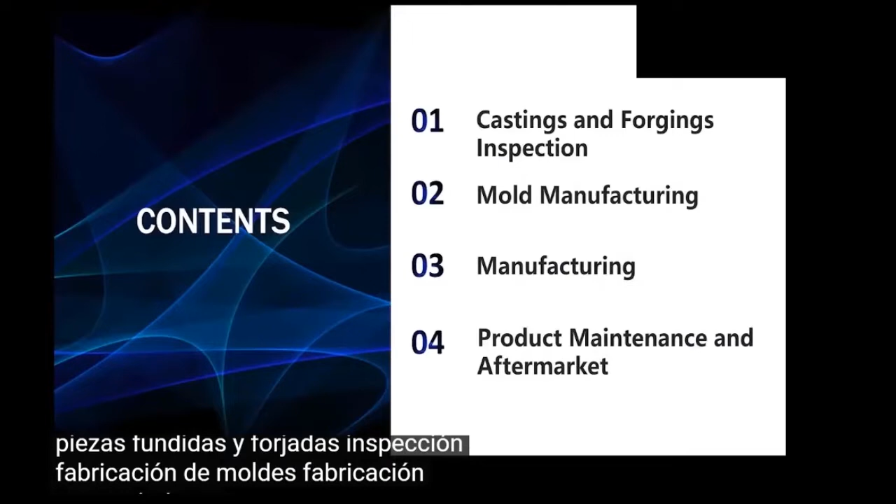Today, the topic is 3D laser scanning technology empowers high-end equipment manufacturing. The presentation consists of 4 parts: castings and forgings inspection, mold manufacturing, product maintenance and aftermarket. These are also the main phases of industrial manufacturing.

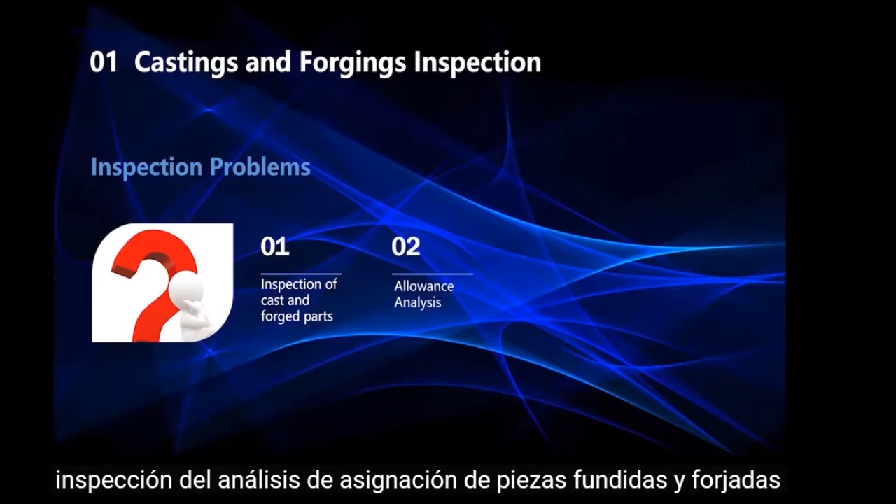First, let's talk about how 3D scanners are applied in casting and forging. There is a long history of casting and forging, which can date back to thousands of years ago. Here, I will discuss 4 aspects of the inspection. Inspection of the cast and forged parts. Allowance analysis. Delivering the inspection results to the manufacturing equipment. The last is the optimization of the design of casting mold and forged die.

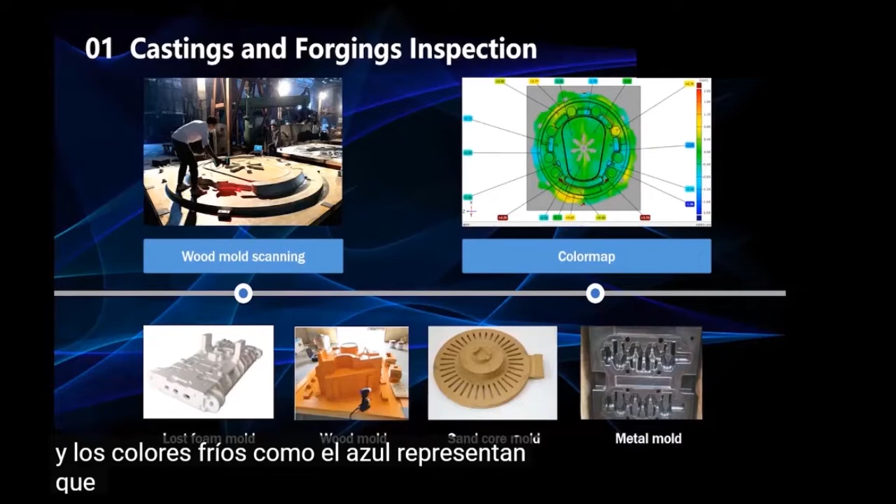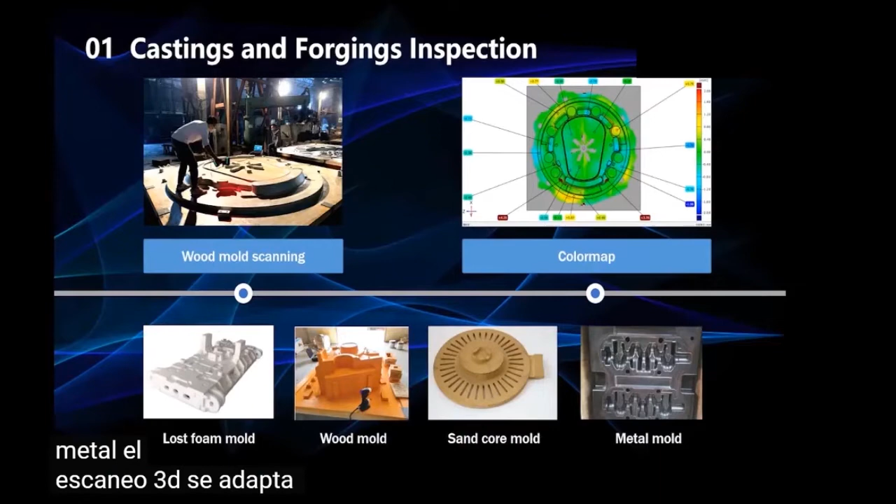The warm colors such as yellow and red and cool colors such as blue represent that deviations are outside the desired range. It is very convenient to identify these deviations to correct these molds. The molds come in different types: lost foam mold, wood mold, sand core mold and metal mold. 3D scanning suits well for these molds. Now, I'll show you some examples of how 3D scanning is used in mold inspection.

Allowance analysis is the basis of the measurement of the cast and forged parts. When a forged part is manufactured, we should identify if there are sufficient or insufficient allowances on the pre-machined surfaces. Then, we need to check whether there is a uniform allowance distribution on non-machined surfaces.

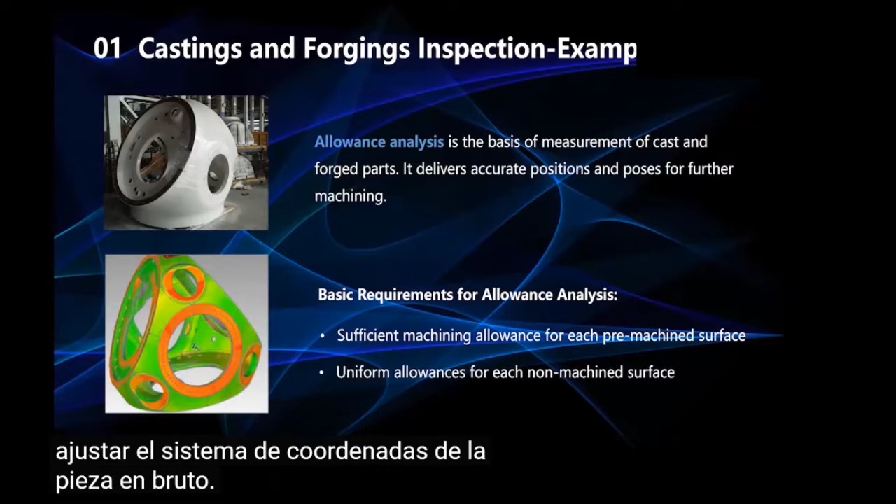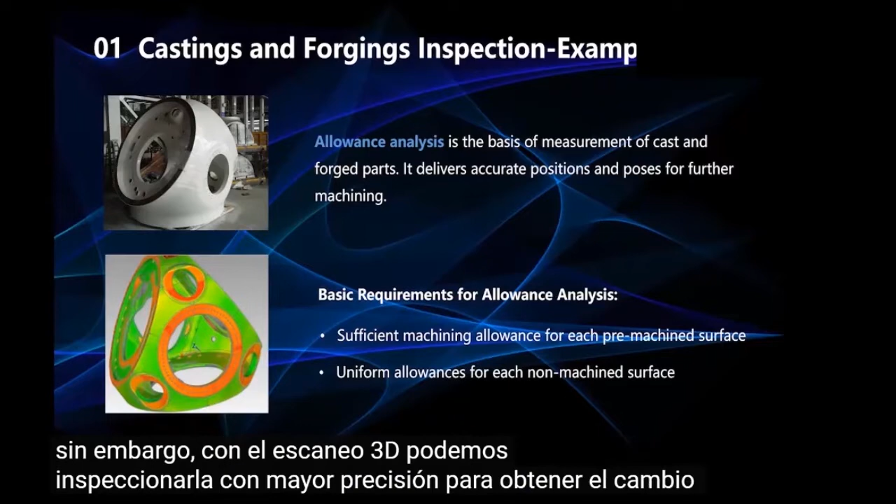The key to precision machining is to adjust the coordinate system of the blank. In some cases, the blank can't be precisely machined with traditional ways. However, with 3D scanning, we can inspect it more accurately to get the chance to adjust its coordinate system and machine it. How to machine the blank? We need to obtain the datum for the tool setting. I've listed a few of them here.

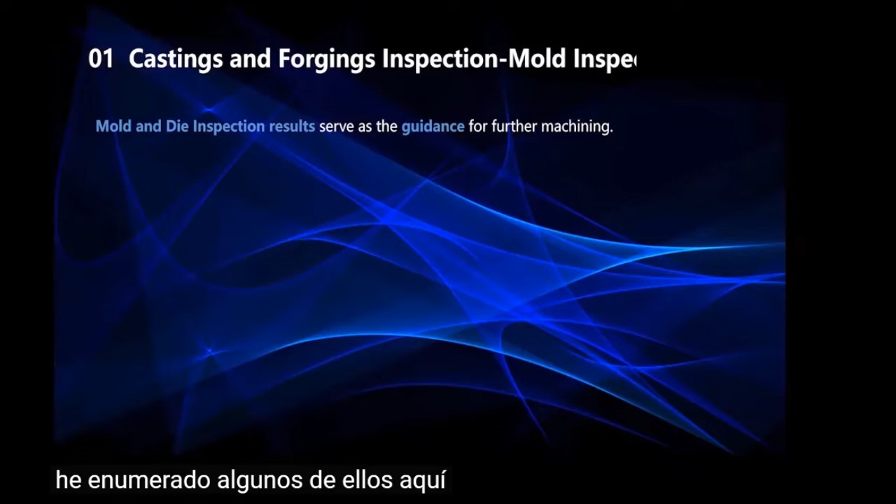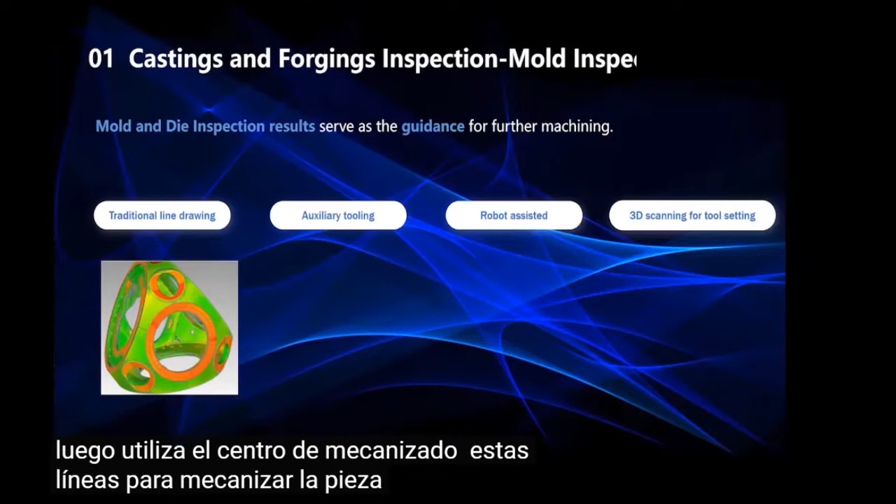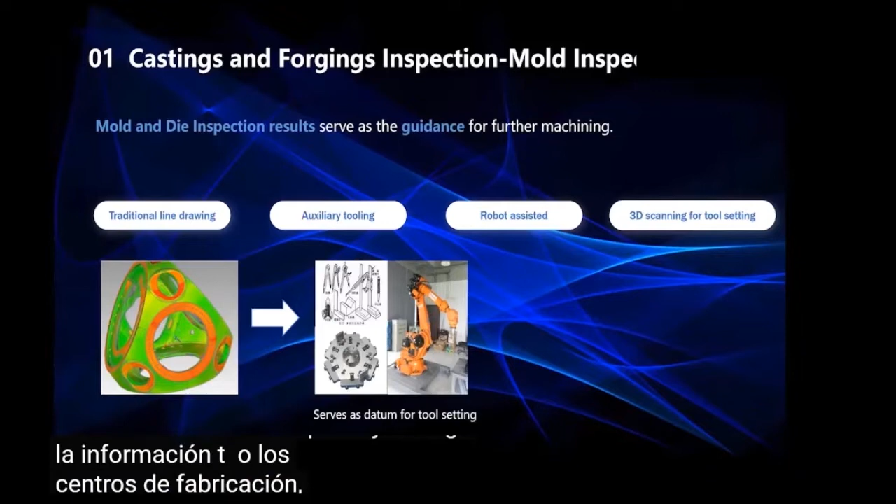Traditional line drawing. Technicians draw lines on the cast part, and the lines serve as a datum. The machining center then uses these lines to machine the part. Second, auxiliary tooling. Then, the robot-assisted method. The robot marks the part and delivers the information to the manufacturing centers. Another way is to align the scanned data with the equipment of machining centers. Adjust them to the same coordinate system so that the blank can be applied to the center directly.

Delivering the inspection results to a center for machining is one of the hot topics in the industry. A large number of companies have devoted themselves to researching it. We have done a lot of research on this and completed a lot of projects.

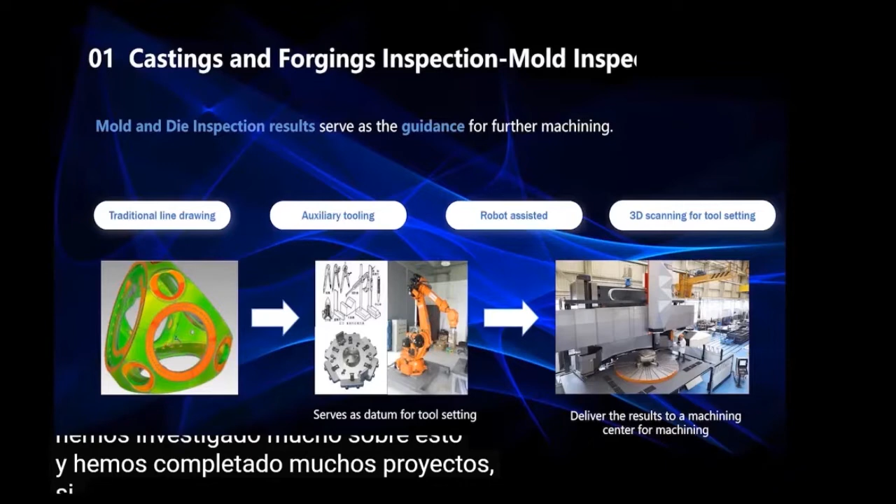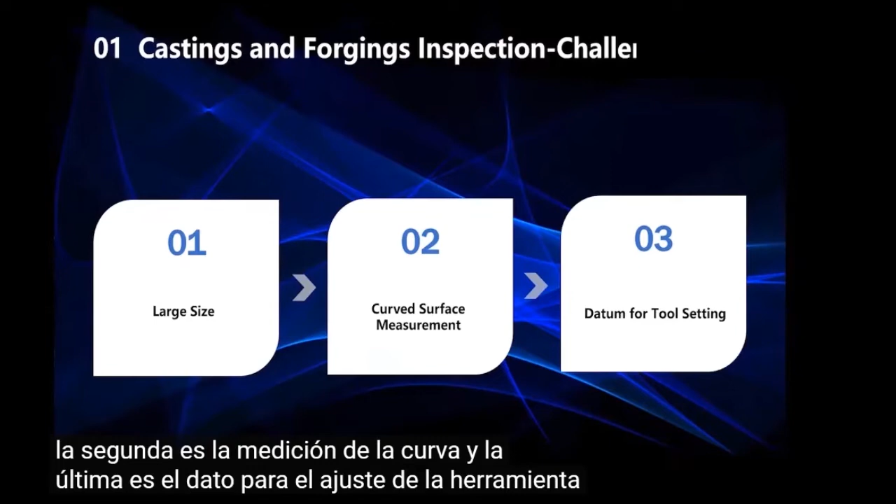Now, let's take a closer look at the casting and forging measurement characteristics. The first feature is large size. The second is curved surface measurement, and the last is datum for tool setting. So let's look at 2 cases. The first is the inspection of a large-scale wind power hub with curved surfaces.

The ordinary 3D scanner aligns scans with markers. When it comes to 3D scanning this huge part, alignment by the marker is insufficient to obtain precise results. Its alignment errors accumulate over the distance of measurement. There is a particular technique called photogrammetry, which suits well for wide-range measuring. It can take pictures from different angles with coded markers to obtain 3D coordinates.

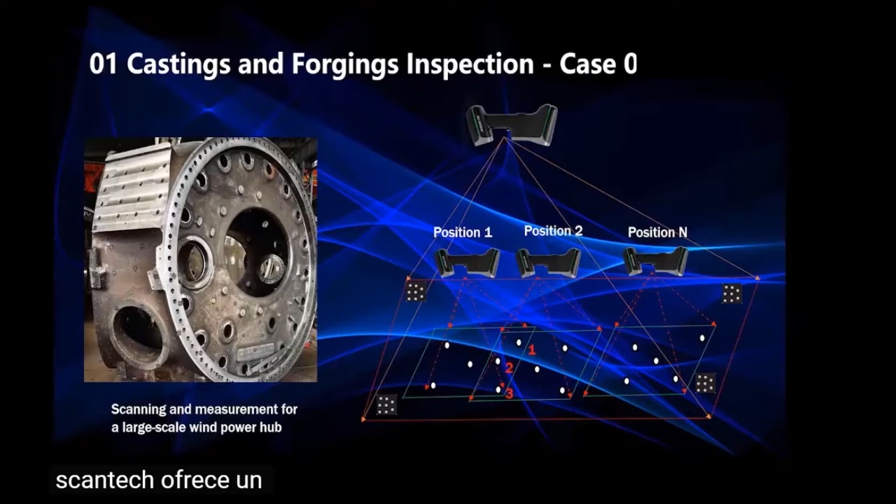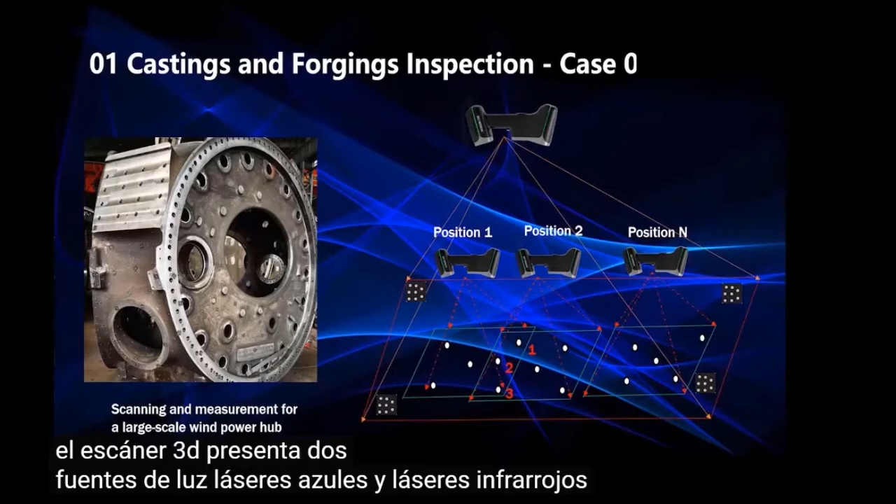The second case is a mold that features deep grooves. 3D scanners project lasers onto the surface of a part, and its two cameras are used to capture the reflected lasers. These two cameras have to see lasers at the same time. The camera distance of ordinary 3D scanners is relatively long and it is hard for them to capture details in grooves.

We have a compact 3D scanner SimScan that is specially designed for it. The distance between its two cameras is much shorter, and the angle between the two cameras is relatively small, making it convenient for scanning deep grooves.

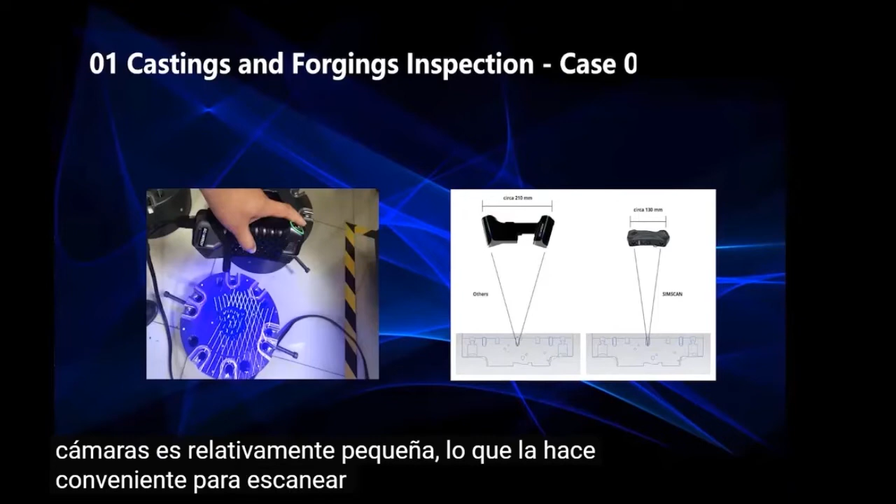Now, let's move to the second part, mold manufacturing. Mold is known as the mother of industry. It is a piece of important equipment in product manufacturing. A part that is newly cast will be sent to the machining center. The first task is the inspection of the rough part. We need to check its allowance.

Its allowance may be sufficient for machining, but it may be non-uniform over the surface. There may be 20 mm allowances on one area and 2 mm allowances on another area. If we refer to a CAD model to set the machining program, we may face the challenge that the machine fails to eliminate the metal layers thinner than preset parameters. Therefore, we waste time processing. 3D scanners can obtain the accurate data on the blank and adjust the machining equipment by setting the program precisely.

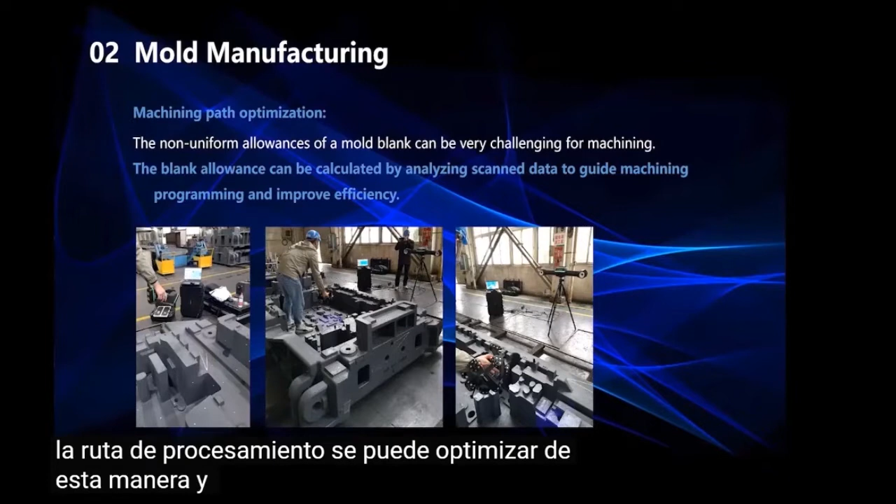The processing path can be optimized in this way and increase machining efficiency. What else can we do? We can scan the mold machined and compare it to the CAD model to generate a report. The color map report can tell deviations intuitively. Green means qualification and red means disqualification. We can even get the specific values of deviations.

Here is another example, which is assembling analysis. When the mold is manufactured, we must check whether the punch matches the die by assembling them. Check the interference or gap. Our 3D scanner can scan the die and punch fully and virtually assemble them on the computer to analyze it quickly. It's also a meaningful way to improve efficiency.

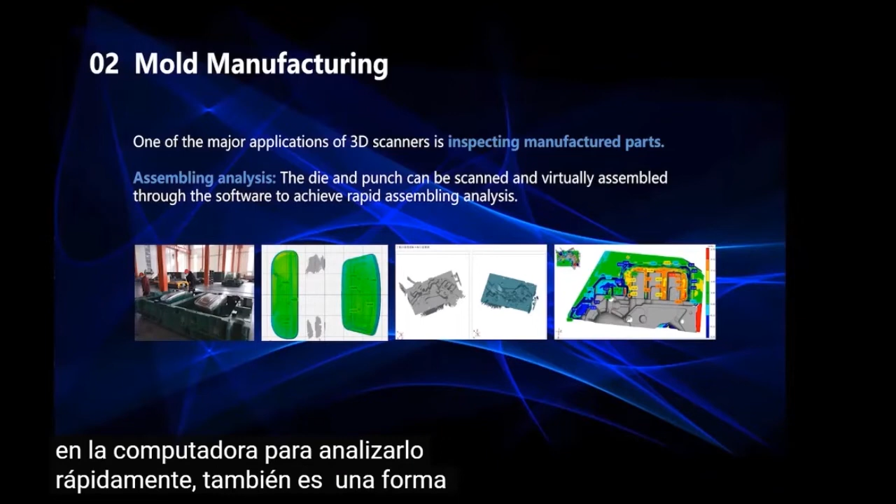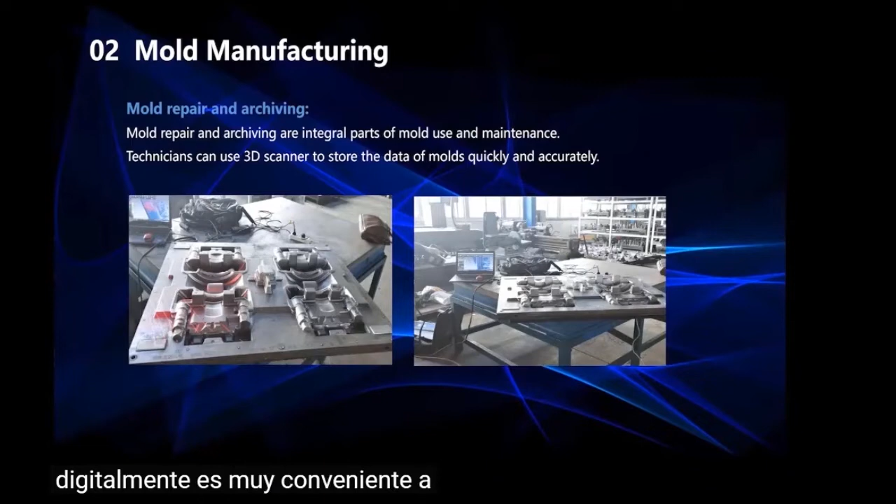The in-service molds are subject to wear and tear. So, we need to repair them. Our 3D scanners can scan the mold and compare it to the original model to identify areas to be repaired precisely. During the repair, there are many versions of changes. We can record these changes digitally by scanning parts and storing them digitally. It is very convenient.

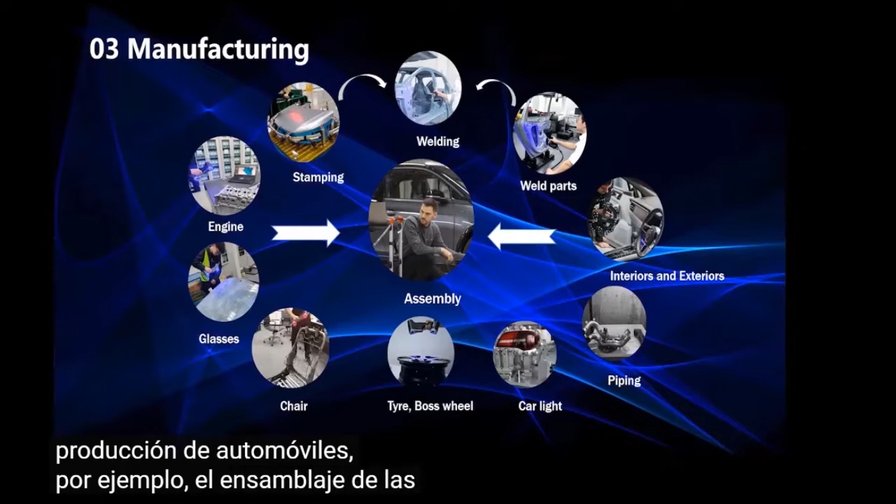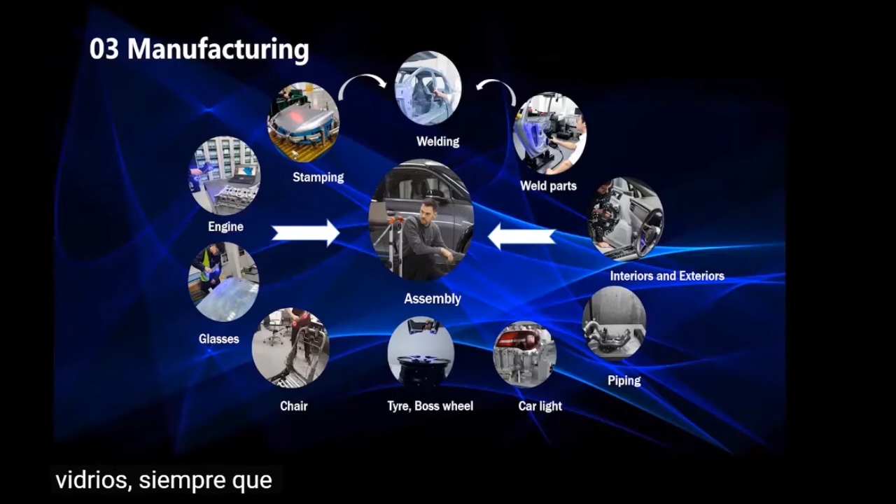Next, we'll talk about manufacturing. 3D scanners are widely used in this industry. Let's take the automobile industry as an example and look at the process of producing automobiles. For example, the assembly of the engine, stamping parts and the subassembly. There are interior and exterior piping, lights, tires, wheel hubs, seats, and glasses. As long as the dimension is involved, a 3D scanner is needed. We can use 3D scanners to analyze the dimensions.

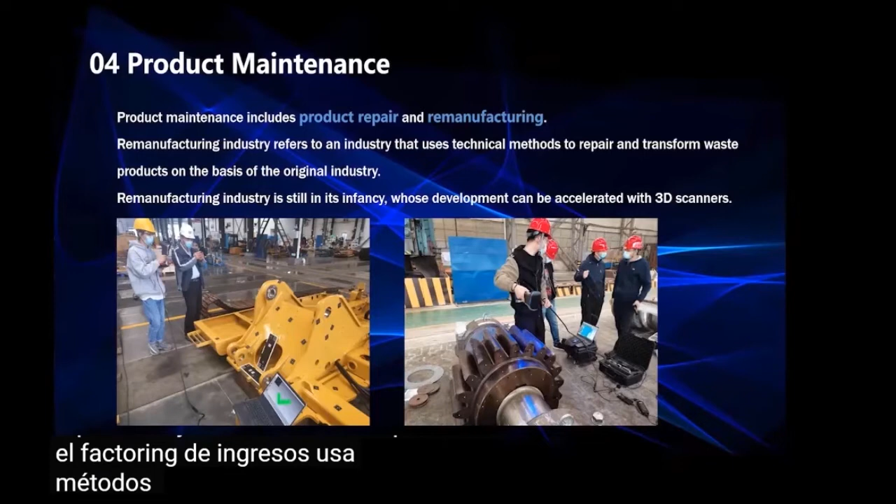Besides the manufacturing, another application is product maintenance and aftermarket. The maintenance part of the product is a process of remanufacturing. It is an emerging industry. Product maintenance includes product repair and remanufacturing. The remanufacturing uses technical methods to repair and transform waste products based on the original sector.

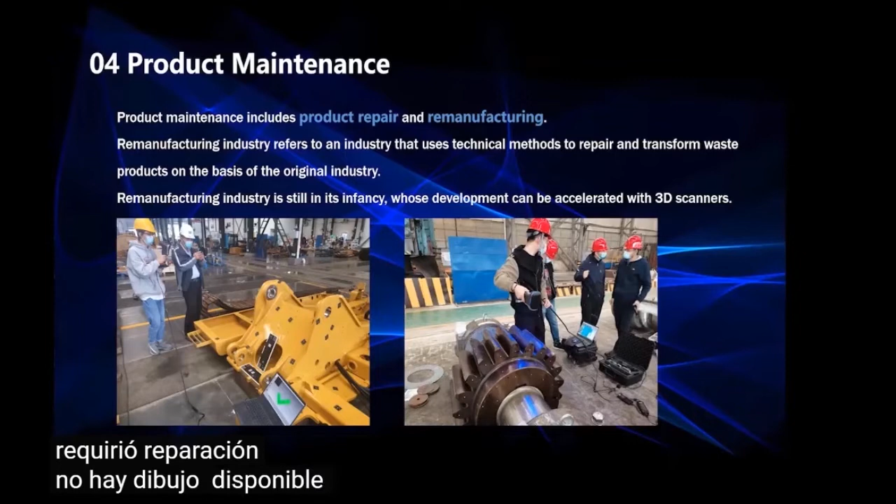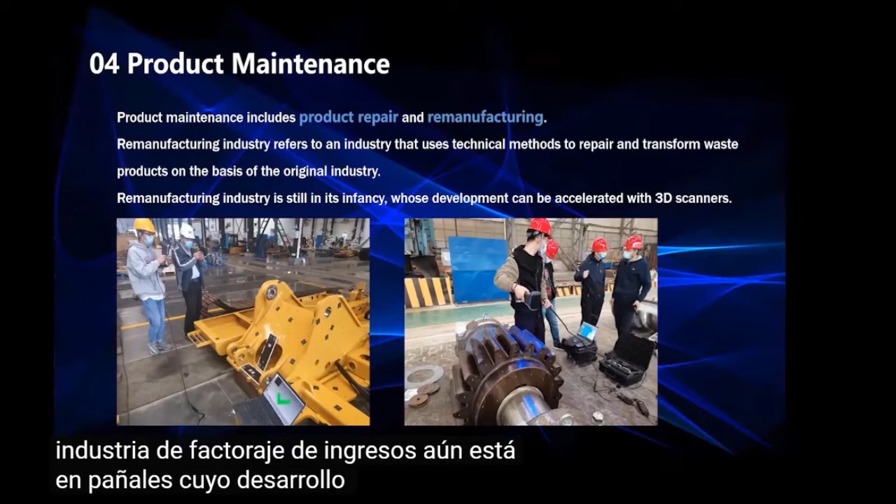The picture on the left is of a broken-down engineering machine, and some of its shafts were broken. Or we can say the shaft was deformed and required repair. There is no drawing available, so we need to scan it first. After analysis, we can provide guidance for the remanufacturing. The picture on the right is the scanning and analysis of a part for repair. Remanufacturing industry is still in its infancy, whose development can be accelerated with 3D scanners.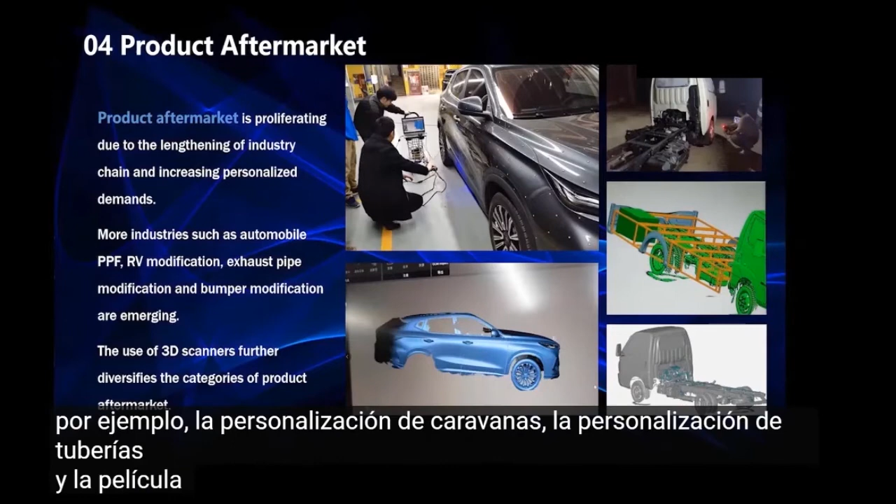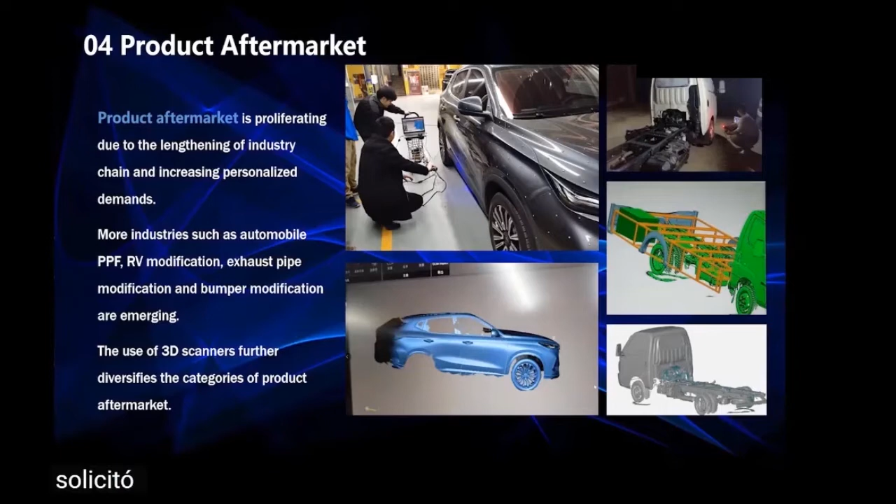Another application of the product aftermarket is customization. Customization is proliferating as the living standard improves. For example, caravan customization, pipe customization, and paint protection film. Our 3D scanners can obtain the dimensions of parts and conduct various tasks. Therefore, we can be confident in saying that 3D scanners can be widely applied for customization.

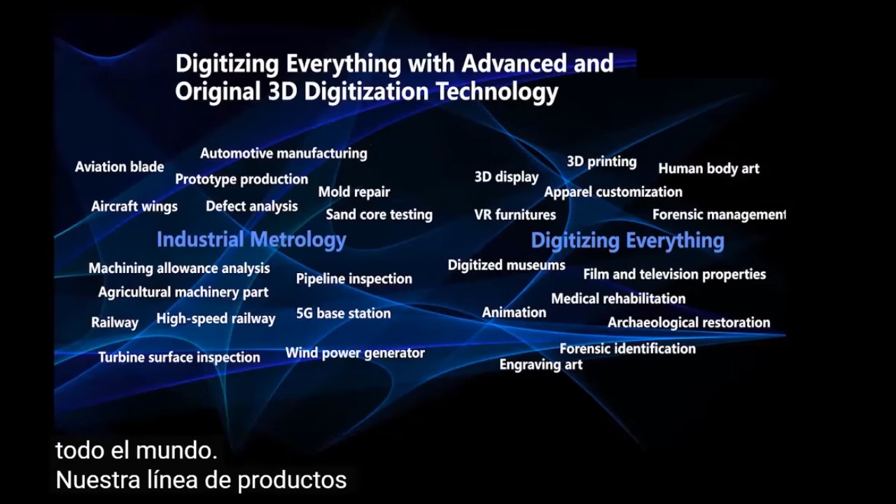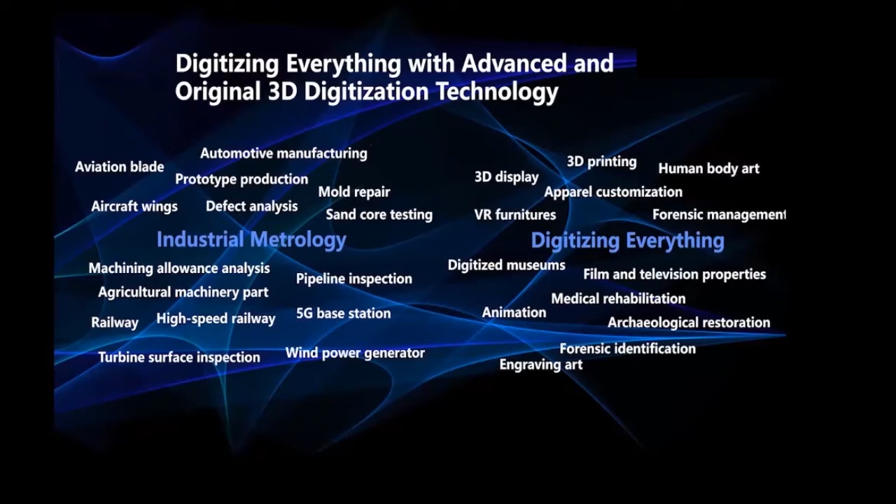Today, my topic is how to utilize 3D digitization technology to empower 3D printing. Scantech is one of the earliest high-tech companies starting to research and develop handheld 3D visual measurement devices worldwide. Our product line ranges from metrology-grade online and offline equipment to consumer-grade color 3D scanners. Scantech's 3D scanners are widely used for metrology in industries such as aerospace, automotive/rail transportation, machinery manufacturing, and so on. Besides that, we are working hard to improve our in-house 3D digitization technology. Combining 3D scanning and 3D printing is one of our core research areas.

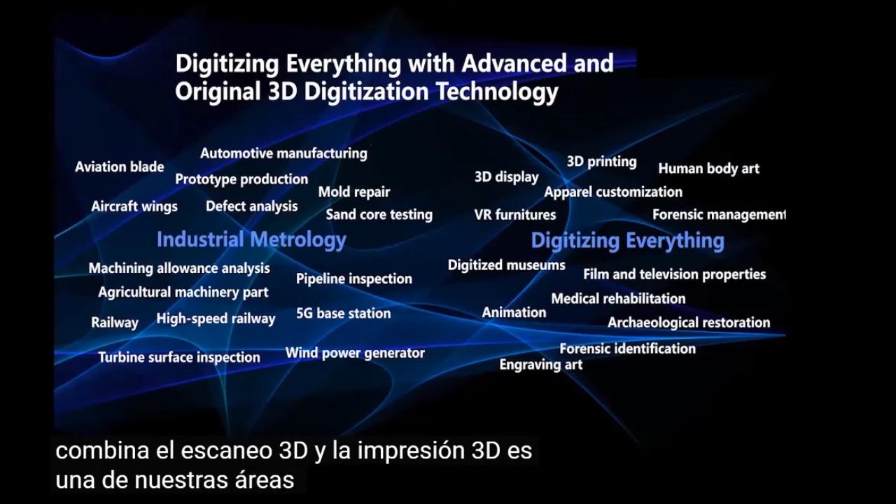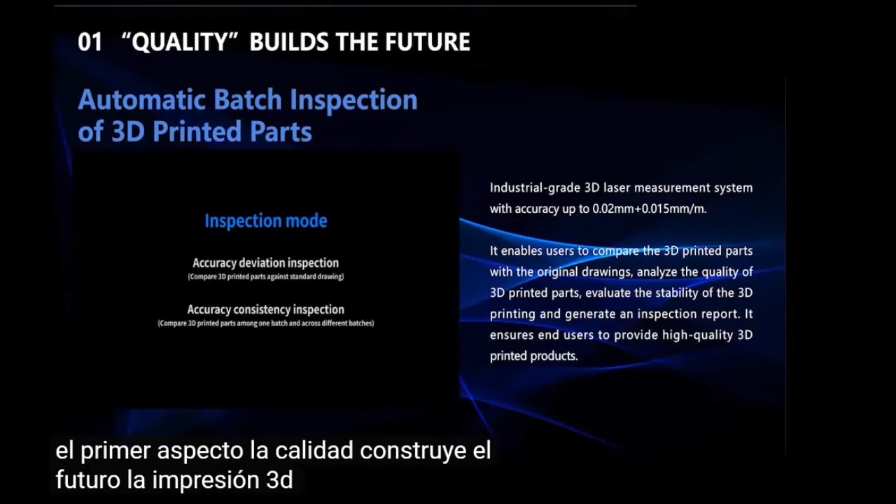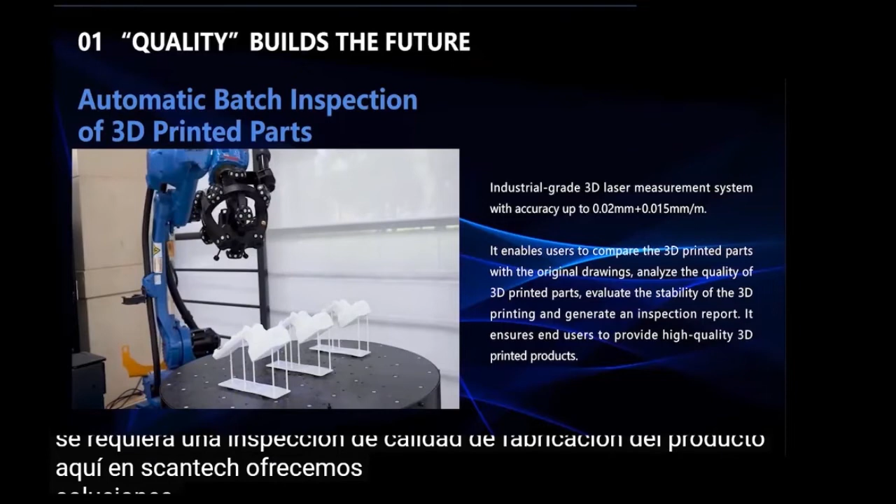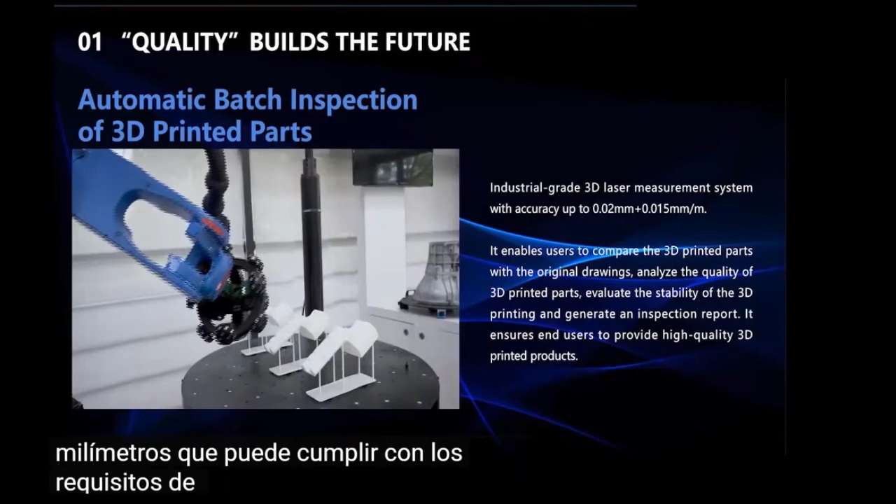Then, I'll introduce you to 9 aspects of 3D digitization technology, how we utilize 3D digitization technology to empower the 3D printing industry. The first aspect, quality builds the future. 3D printing requires high-end tech and strict quality control. As long as there's product manufacturing, quality inspection is required. Here, at Scantech, we offer mature solutions for automated batch inspections. The industrial-grade laser 3D scanner we use has a maximum accuracy of 0.02 mm, which can meet the inspection requirements for most 3D printed parts.

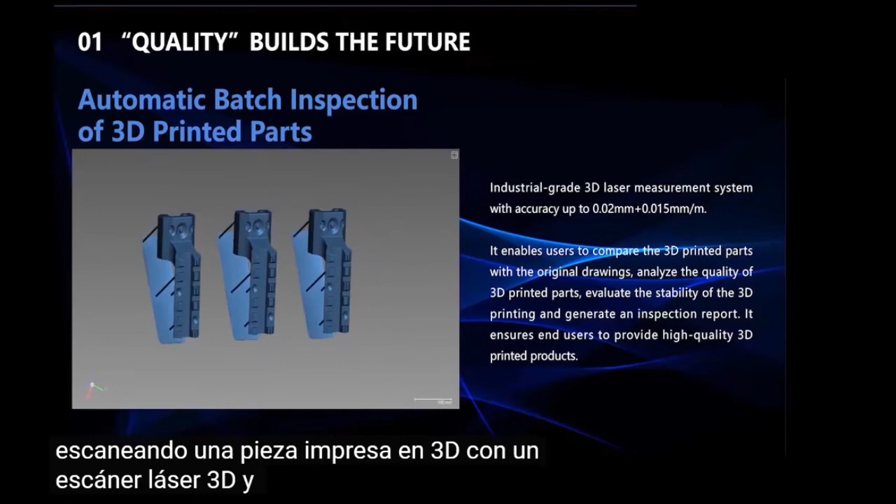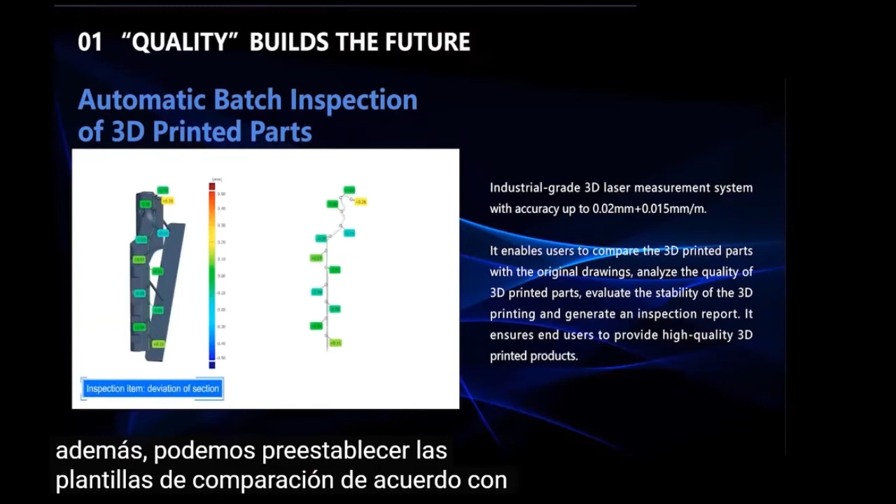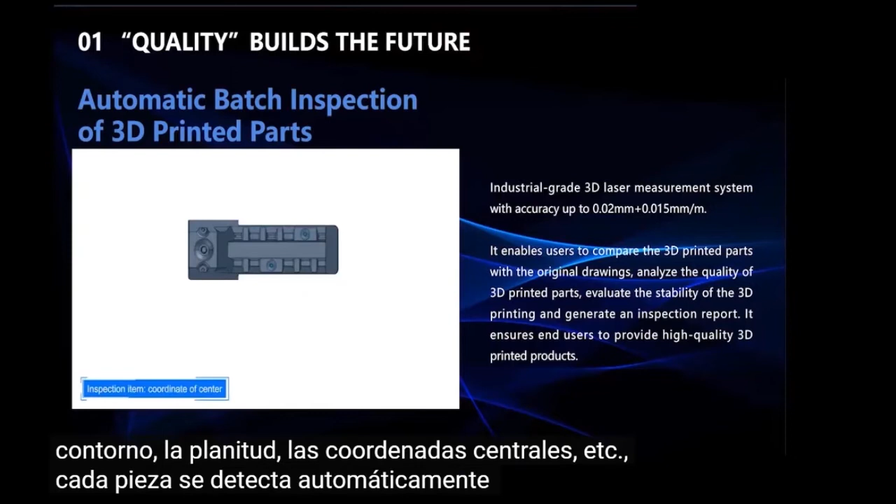As we can see in the video, we can automatically generate a color map by scanning a 3D printed part with a 3D laser scanner and compare it with the original CAD model. In this way, we can tell if it is qualified or not at a glance. Besides, we can preset the comparison templates according to the inspection requirements to inspect items such as section deviation, center distance, contour, flatness, center coordinates, etc. Each part is automatically detected one by one according to the templates with an automatically generated inspection report.

This fast and comprehensive inspection method can be used in 2 aspects. One is to scan the finished 3D printed parts, compare them with the standard drawings, analyze the quality of 3D printed parts, evaluate the stability of the 3D printing and generate an inspection report. It ensures end users are provided high-quality 3D printed products. The other one is to use it to detect and compare different parts in the same batch or different batches, analyze the stability of 3D printers, and assist in the research and development of 3D printers with more stable production performance.

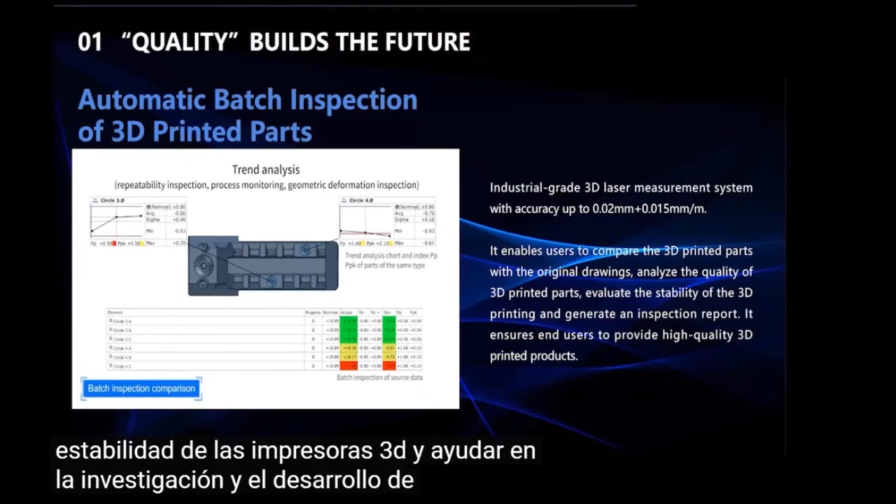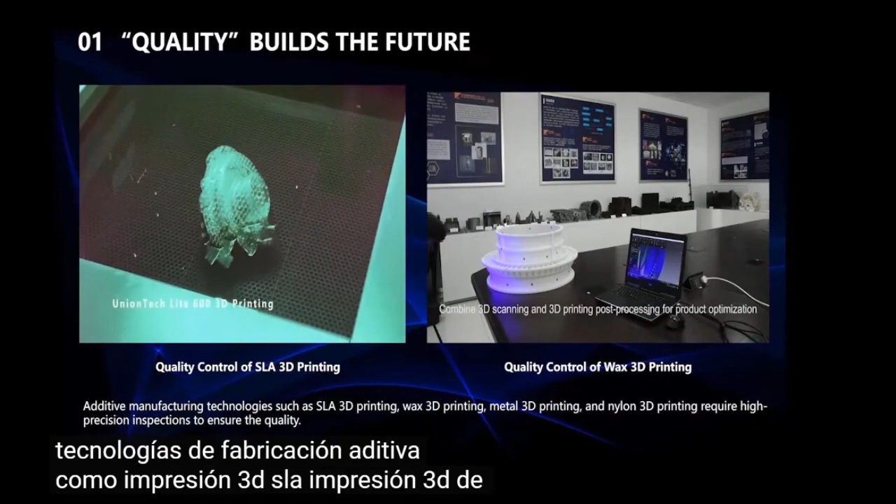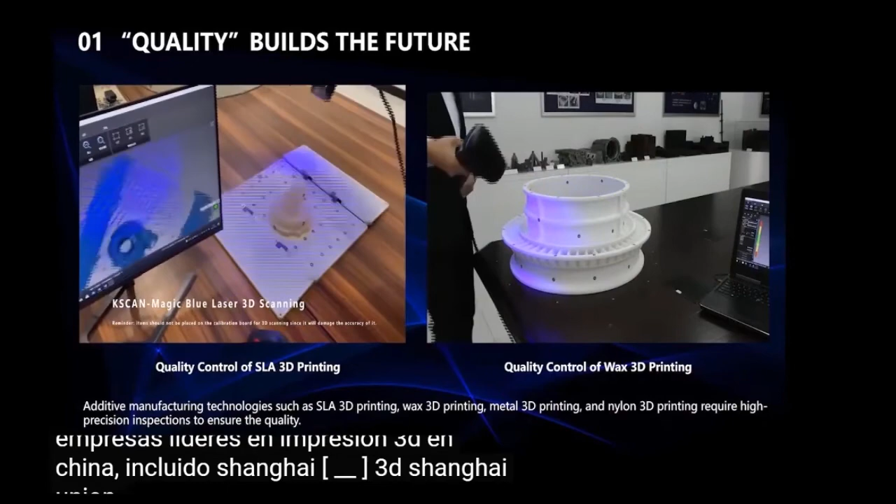We have successfully implemented this high-precision detection method in additive manufacturing technologies such as SLA 3D printing, wax 3D printing, metal 3D printing, and nylon 3D printing. Leading companies in 3D printing in China including Shanghai TPM 3D, Shanghai UnionTech, Beijing Longyuan AFS, have used our 3D laser scanners for daily production inspection or supplying our products to their customers, providing complete product delivery solutions.

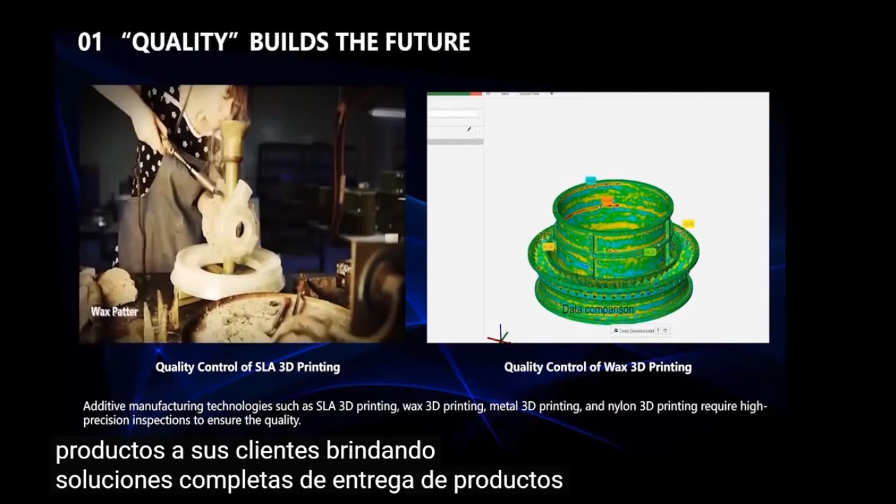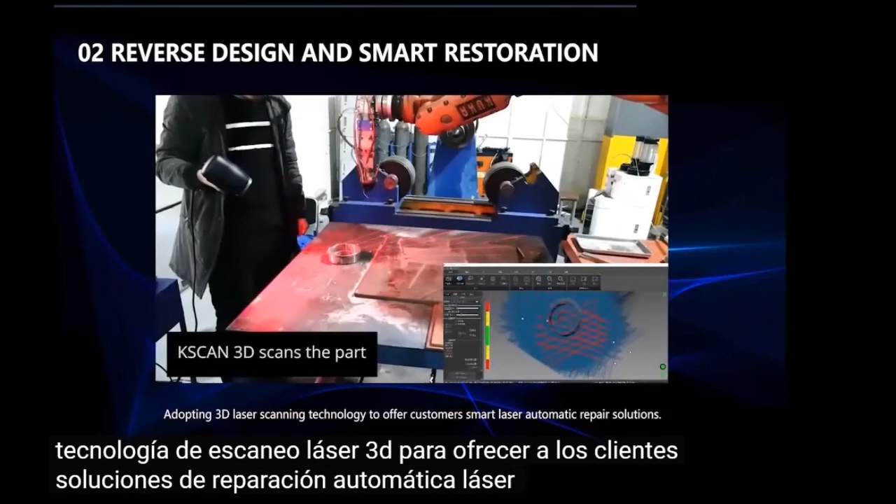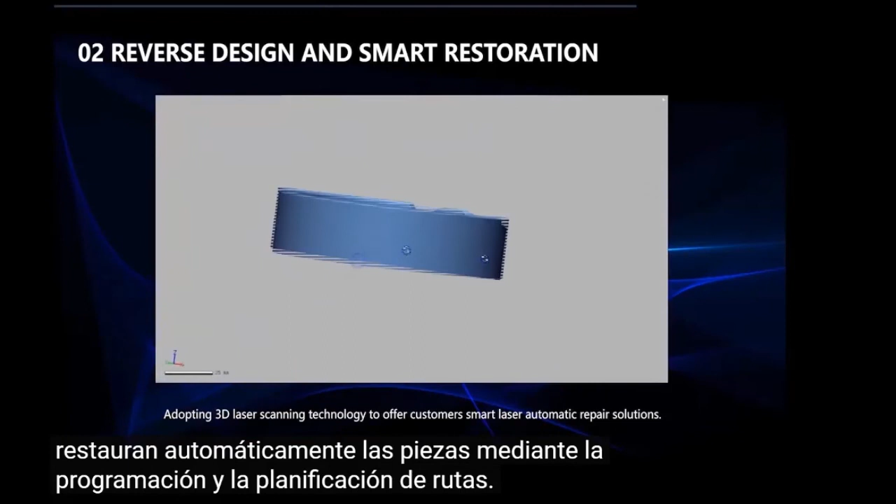The second aspect is reverse design and smart restoration. One of our partners adopts 3D laser scanning technology to offer customers smart laser automatic repair solutions. This video demonstrates how to obtain 3D data of unrepaired parts by a 3D laser scanner, reversely acquire high-precision 3D models of the damaged parts by third-party design software, and automatically restore the parts by programming and path planning. The integration of the 2 technologies can help the manufacturing industry perform better.